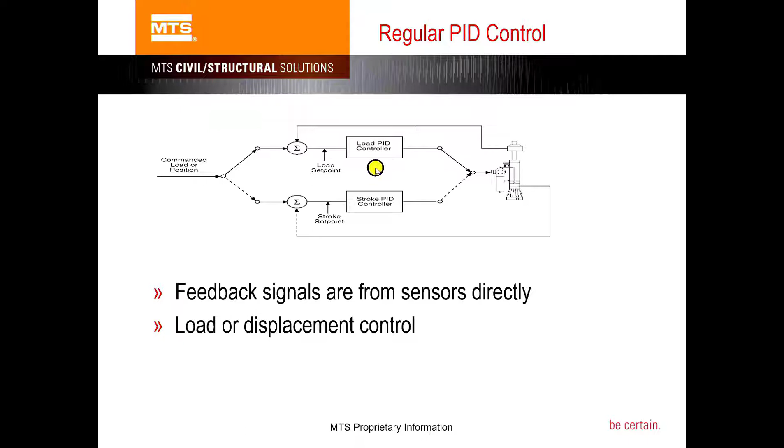You can do either load control or motion control, displacement feedback or force feedback, right? You have your command, you have your feedback, you close the loop based on that. That's easy if it's only one channel, one single actuator. But for example, DOF control, if you have 2 actuators now, a left one and a right one, and you are controlling this table, it needs to be controlled in the global degrees of freedom: the axial and also the rotational degree of freedom.

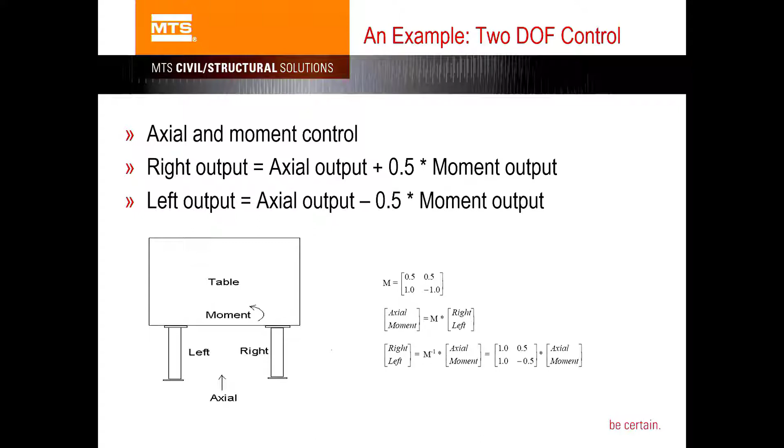So what you really care about is the structure degree of freedom. And then you can use the MTS calculation channel function to set up some simple functions to do that coordinate transformation, right? Because between the left and right actuator space and the global structure space, you can set up those equations easily and convert them into the matrix formulation.

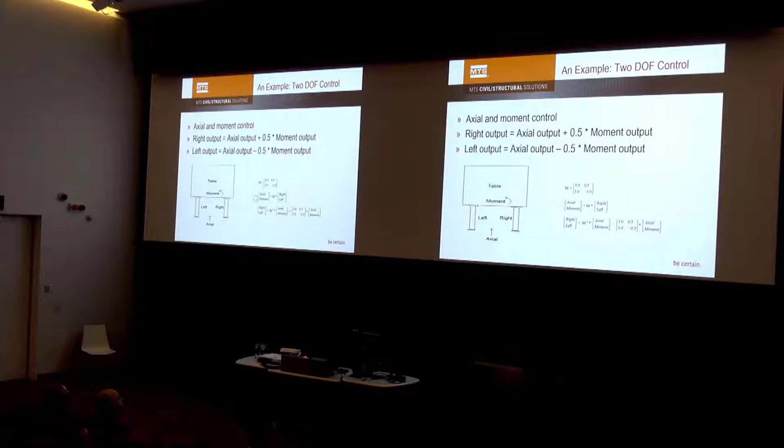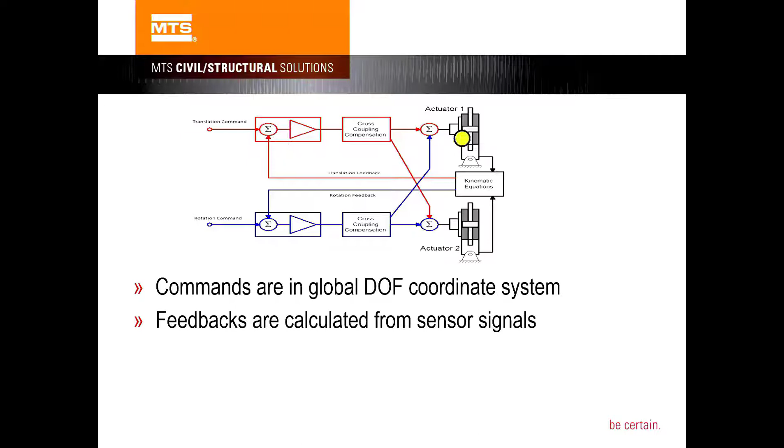And then now you are able to do DOF control, for example. Now your commands are all in the structure degrees of freedom, right? The translational and the rotational. And your feedback, of course, is still in the actuator space. So you need to go through some sort of transformation so that your feedback is also in the global DOF, degree of freedom space. Then you can do this calculation and this kind of control. You can do either force or displacement control, right?

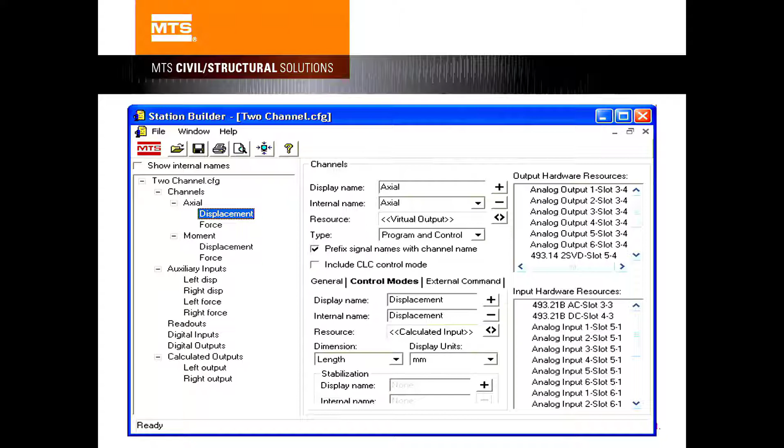So in terms of setting up, in MTS Station Builder, when you build a station, because this axial and moment are based on calculations, you use a virtual output instead of real hardware resources. And this virtual output can be expressed in the calculation editor. So you basically write out the equation between your structure degree of freedom and the actuator degree of freedom, right?

So what are the advantages of using this calculation function? First, this calculation editor in MTS software could involve operations on basically all the signals which go into your controller. Not only every single actuator displacement or force, command, or the servo valve drive, anything inside your controller, those signals can be manipulated and operated on using this calculation channel function.

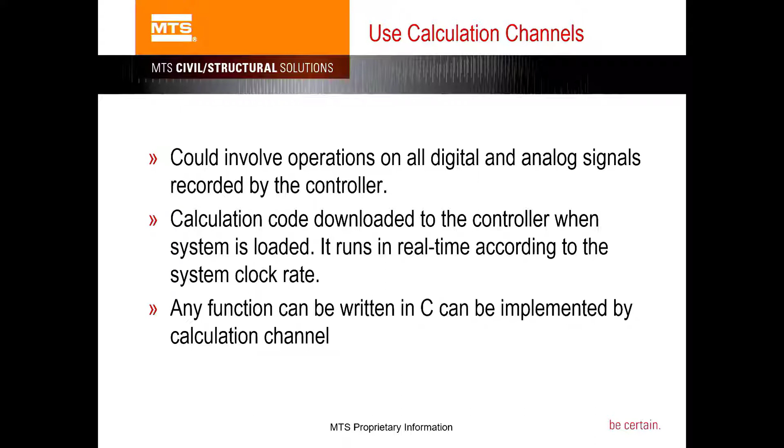And also, when you write down the calculation equation, this code will be downloaded into the controller, and it can be executed in the controller in a real-time fashion, right? It saves you trouble because you don't need to go deep and write your own C code. You can use the calculation editor to easily write down your equations. But if you are an expert in C, then you can come up with some fancy calculations, and this code will all be compiled into the controller to run.

So in terms of another application, a little bit more advanced application for this calculation editor, for example, this is the Newmark integration algorithm for hybrid simulation. For example, if you have a numerical substructure, let's say a simple shear building, you have a multiple degree of freedom dynamic equation of motion.

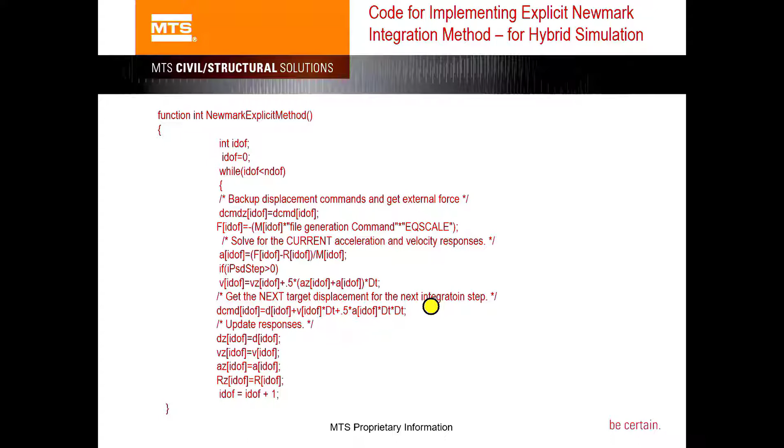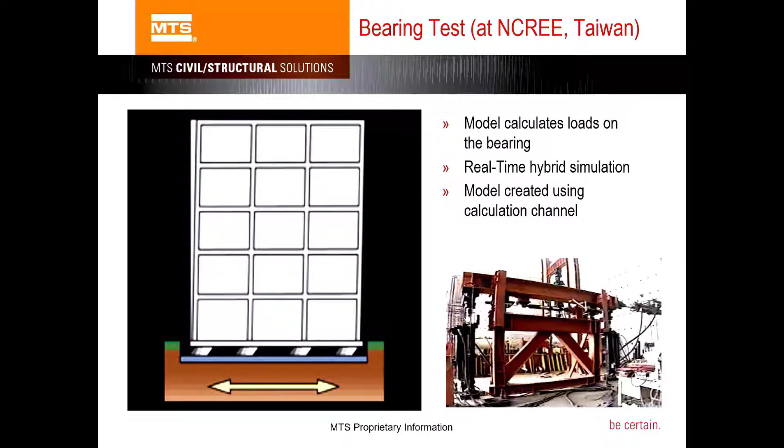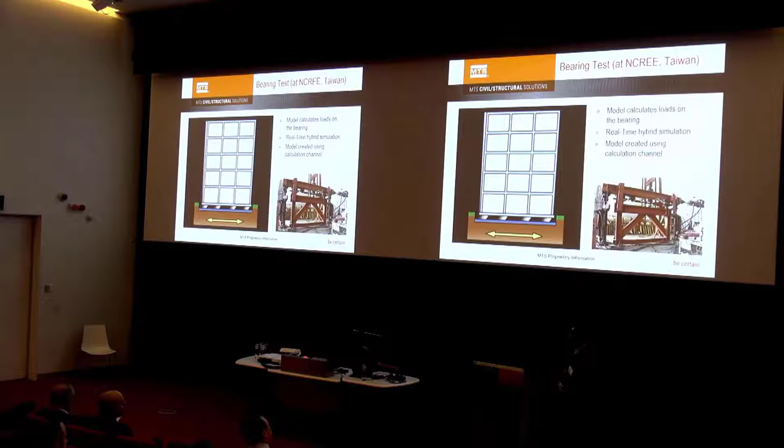Then you can test those physical bearings, because they are very nonlinear and they are difficult to model. And that's the purpose of hybrid simulation, right? You model anything that's easy to model. And then for the difficult to model part, you test them in a physical rig. So that's just one application for the calculation editor in terms of hybrid simulation.

And also a lot of the digital signal processing functions, you can do in the calculation editor. For example, you can set up this finite impulse response filter, FIR filter. So, define your passband, stopband, all these good things, and then do the signal processing directly at the controller level. For example, after you add this filter, you can eliminate your system noise significantly,

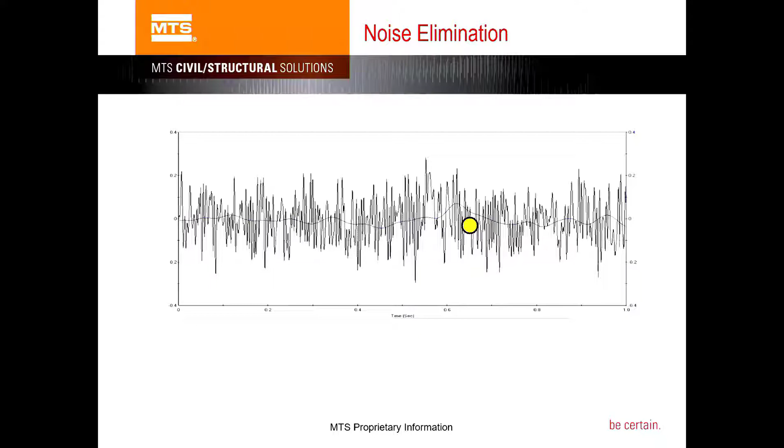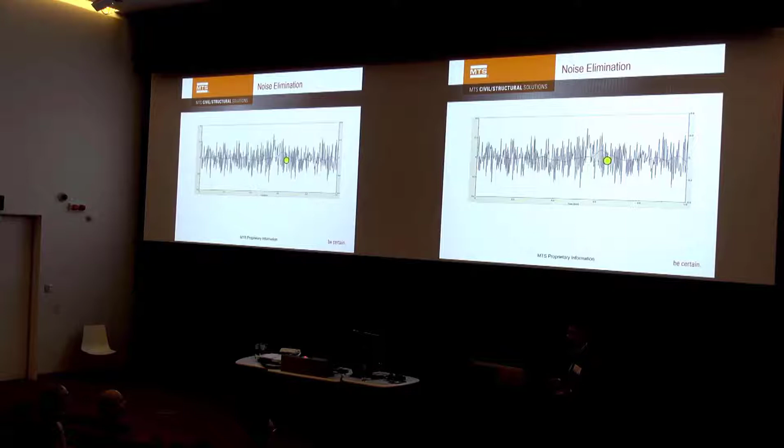because a lot of times, especially when your signal is used to close the loop, those noises can be big trouble. So you can define some filters in there to help your testing, not only in terms of hybrid testing, but also in terms of general, conventional testing. You can do a lot of those in the calculation editor.

So the next tool I'm going to introduce a little more is the MTS DOF control tool. Shawn Gao already covered a little bit about that and gave an introduction. So, for example, this is the Swinburne system. We've already seen that. This is an 8 actuator system controlling all 6 degrees of freedom, right?

And for this type of system, think about it, if you write it down in a calculation editor, that effort becomes non-trivial. You need to write down a lot of equations, and especially it's an over-constrained system because you have more actuators than degrees of freedom, and those equations need to consider all those constraints, so it becomes a non-trivial task. But using the DOF control tool, it becomes much easier for the user to program.

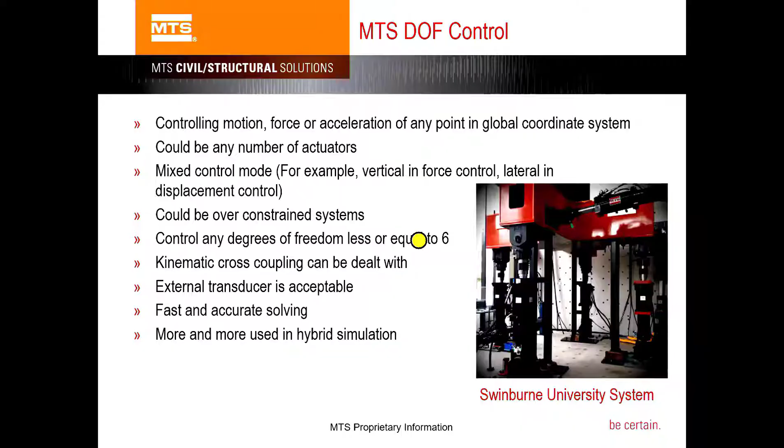So this DOF control has been extensively used in a lot of our advanced systems, and it can be used in displacement control, force control, and mixed control mode, and control any degree of freedom. If you have 3 actuators controlling 3 degrees of freedom, you can also use that tool to build your DOF controller easily. And you can use external transducers, not only the LVDT or the force transducer we provide, to close your loop as well.

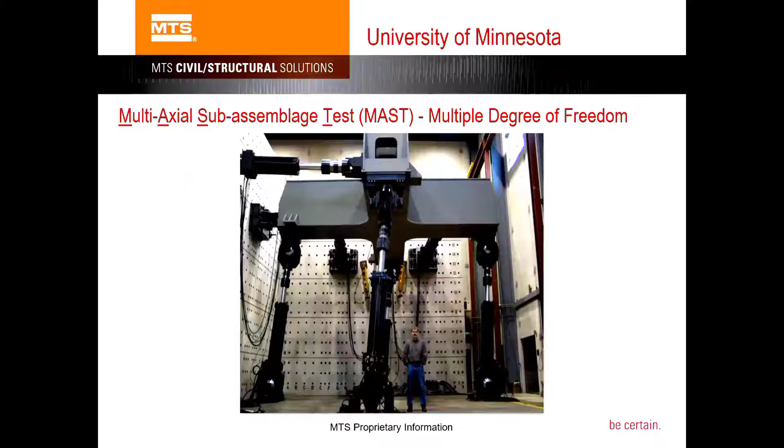And this DOF control has been used in hybrid simulation more and more. And as Shawn already mentioned, the University of Minnesota also has a similar MAST system. And for example, you can even couple multiple of these systems. Both of them are 6 DOF control, and you can set them up to make them move synchronously.

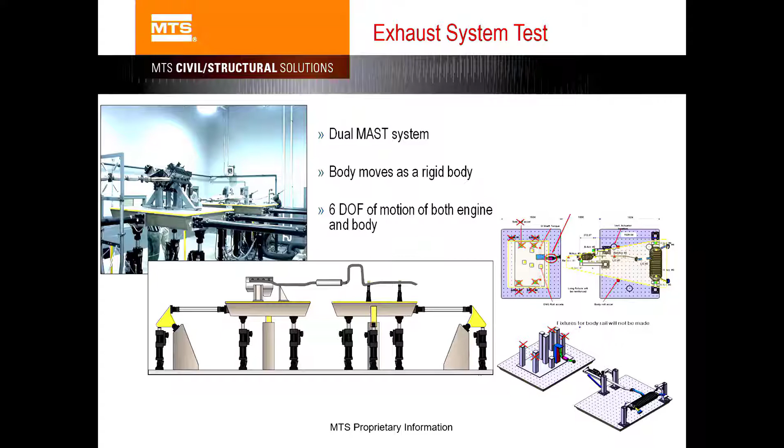And if you are testing a long article, for example, this is a vehicle, actually a ground vehicle application, and it is longer than one system can handle, then you can couple 2 of those tables to do your testing. And in this example, like a 6 DOF shake table, the actuators are all at different angles.

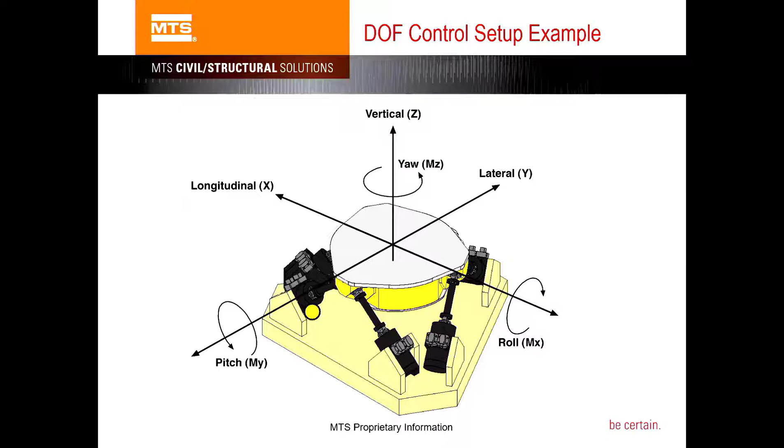Now think about that. If you write out your own equations, with all the large kinematic transformations, it's kind of difficult to program by yourself. But in the DOF control tool, we give you the user interface. You just need to know where, spatially, my control point is, where all the actuators are, and their orientation. You define 2 nodes to define a single actuator. Then it gives you all the visualization, and you can define them very easily.

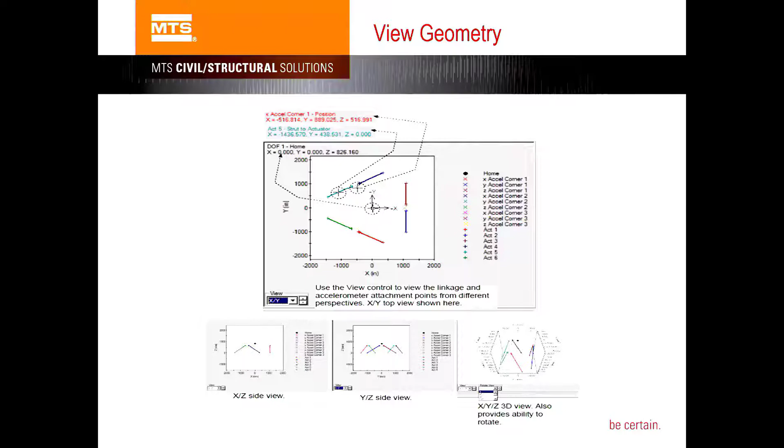Again, just a tool to facilitate any user to do more advanced testing. And in the DOF control, similarly, what happens is your command is in the global structure degree of freedom, and of course your feedback. First of all, they are all coming from individual actuators, and you have to go through some transformation to transform from the local actuator degree of freedom into the global structure degree of freedom. Then they are now all in the structure space. Then you can do your control based on that.

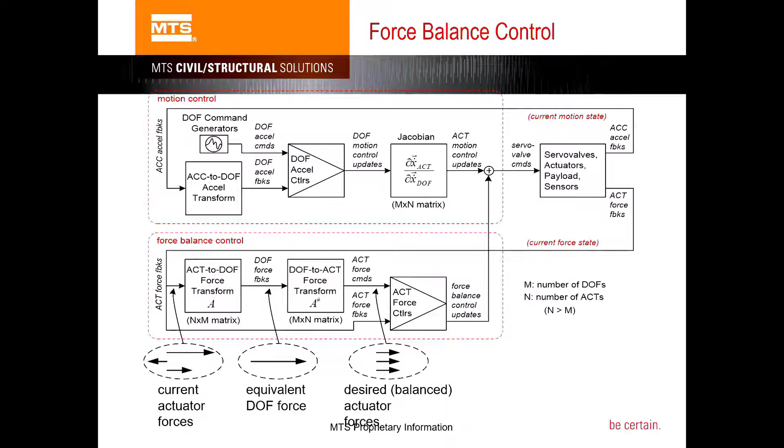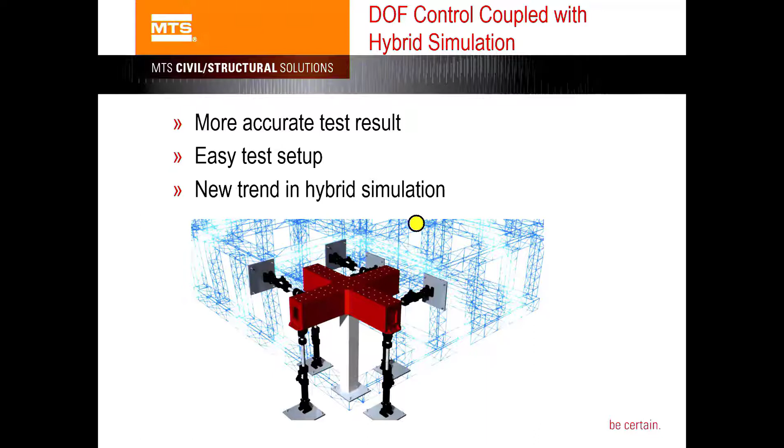And also the force balance control is that you need to satisfy not only the motion accuracy, but also for the mass system, you also maintain the force balance. Then that converges both displacement and force. So this is from Swinburne. You already saw this. So DOF control coupled with hybrid simulation is being more and more used, becoming a very advanced testing system. You can do more advanced hybrid simulation using those tools.

And then, go to the next level: okay, we have those tools. Now, the pseudo-dynamic hybrid simulation solution we offer. So, Shawn, you already covered this pretty much, but terminology-wise, we used to use quasi-static hybrid simulation all the time in MTS. I know Swinburne prefers pseudo-dynamic terminology, and some other universities prefer pseudo-dynamic hybrid simulation. We treat them as just slow hybrid simulation. Quasi-static, in terms of testing, if you only look at the test article, it's like a static test, really slow. Sometimes you cannot even see the motion with your naked eye.

But why do we call it pseudo-dynamic? Because when you do hybrid simulation, your system is a dynamic system, because your numerical substructure has all the equations of motion, has all the mass, inertia and damping terms. So you are solving a dynamic problem. Your whole system is actually a dynamic analysis. That's why we call it pseudo-dynamic, but in the meanwhile, sometimes we also call it quasi-static, just a slow hybrid simulation. So Shawn, you already talked about this.

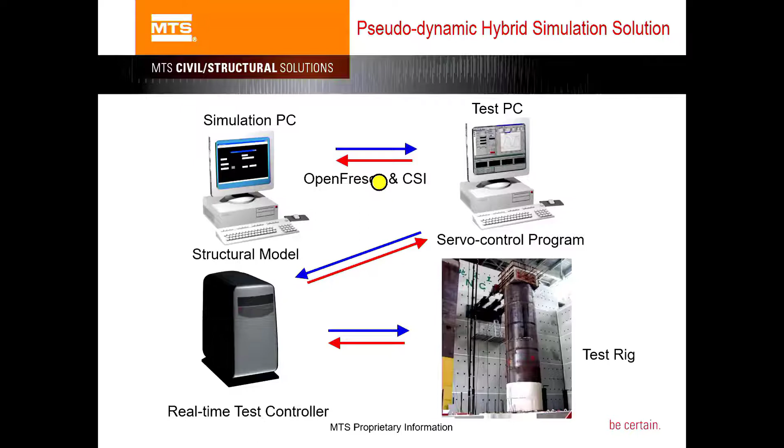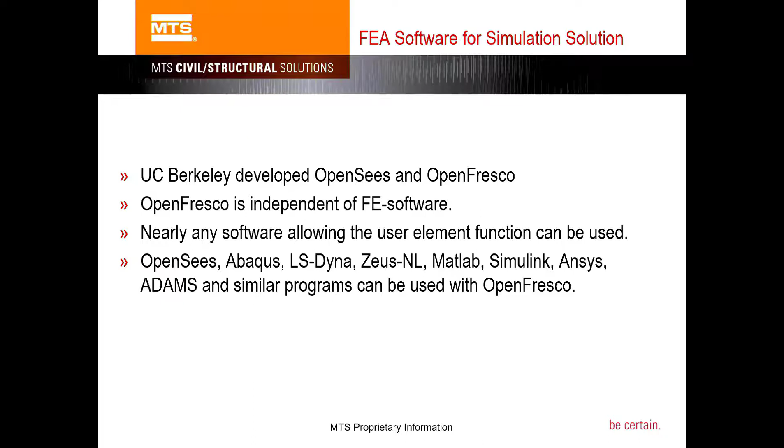UC Berkeley has this nice middleware, OpenFresco, developed, and MTS has associated CSI software. OpenFresco is independent of any FEA software. One of the questions we had before was how OpenSees compares with other commercially available FEA code. You don't necessarily need to use OpenSees. You can actually use ANSYS, Abaqus, and recently we also developed the interface for the multi-body dynamics software Adams. So Adams can be linked into the hybrid simulation world as well.

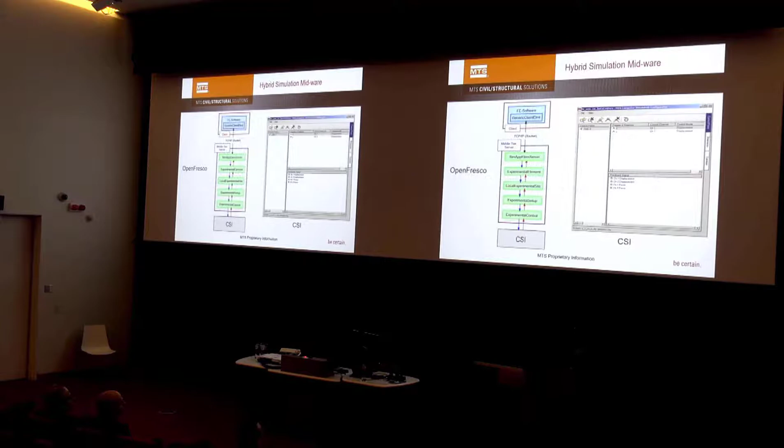So if you are more familiar with Abaqus and ANSYS, you can use that to do your numerical substructure modeling and still use OpenFresco as a middleware to interact with the testing hardware. Those solutions are all ready. So again, that's the middleware, OpenFresco, and this is the CSI, which maps the control channels. Same thing you already saw. This one I'll go into a little more detail. This is the DTU project.

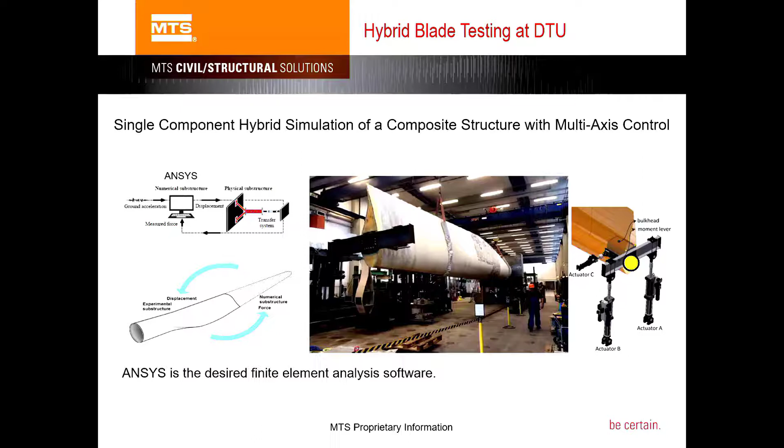They are testing this blade, Technical University of Denmark, and we had a project with them. We traveled to their site and helped them set up their system. In particular, they use ANSYS to model the numerical substructure because it's probably the industry norm and they are familiar with ANSYS modeling. Testing-wise, they use those three actuators to do DOF control to synchronize the boundary condition between the numerical and the physical substructure. During this project, we completed this user element for ANSYS to interact with the hardware. UC Berkeley started that development and eventually MTS completed it and made it available now.

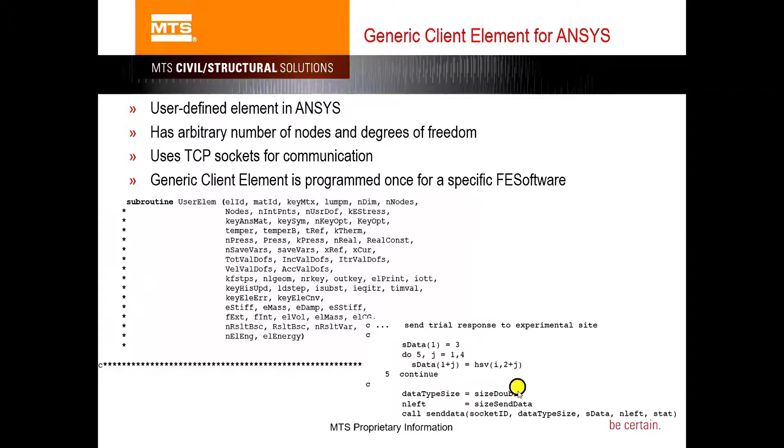In ANSYS, you can define a user element using the provided application programming interface, the API. With this user element, you can define any type of numerical element yourself. But for this specific user element, we are doing a generic client element. This client element is actually just doing communication, passing the command and feedback between the numerical world and the physical world. So we completed that development, went to DTU, and gave the tools to them.

But this is a test we did at MTS just to prove the concept that this code is working. That's just a very simple frame structure we built. And this is a physical column we are testing at MTS. Unfortunately, we don't have the luxury of such a nice system like you have in your lab. So that's what we have, and we just tested that.

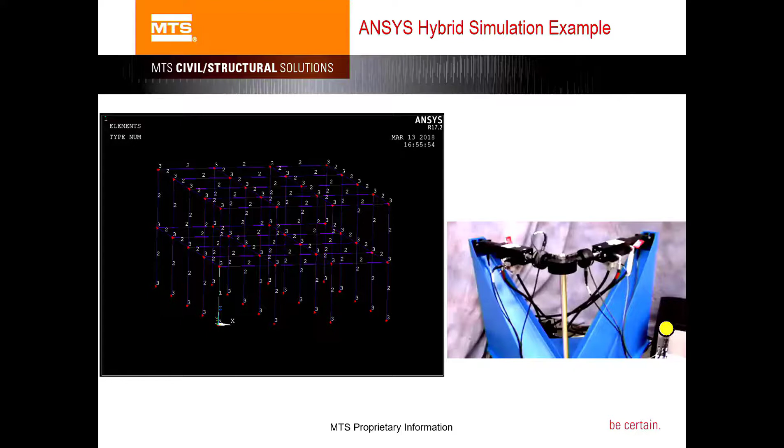Just to give you a quick video. It works like this: ANSYS is solving the model, right? And in the meanwhile, it's driving this physical substructure, and the feedback goes back from the physical substructure to the numerical substructure. And this is pseudo-dynamic, a slow hybrid simulation, right? Because ANSYS doesn't solve as fast as the real-time requirement, so it has to be slower than real-time.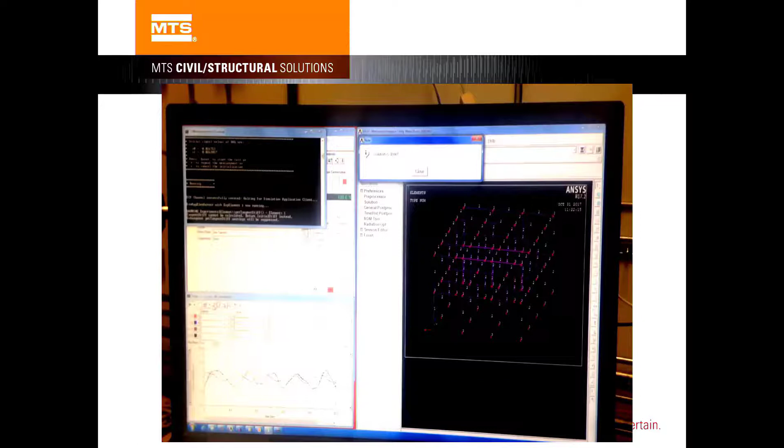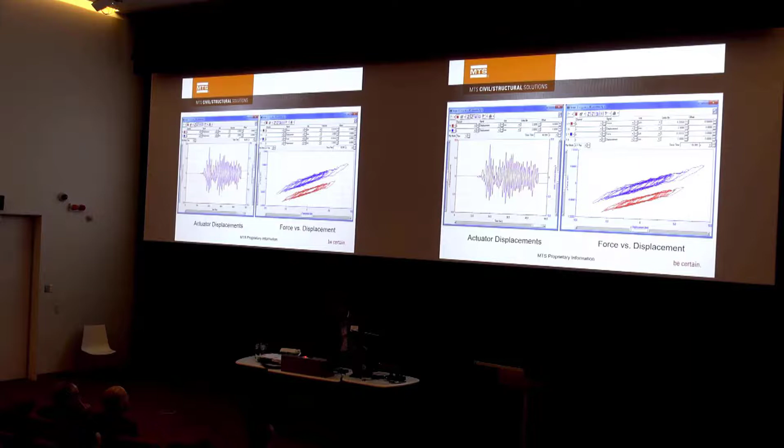So those are the results we had, X, Y, we have two actuators, right, X and Y direction. And then the hysteresis, because that column base is actually quite a nonlinear hinge in there.

And we talked about this geographically distributed hybrid simulation in Professor Mahadi's introduction. That's a very powerful tool, because now you can link resources around the whole world. Any single lab doesn't have all the testing equipment you wish to have. If you have multiple labs, you can collaborate and do this distributed hybrid simulation. And some people actually already claim they can do distributed hybrid simulation in real time. There are some publications already on that.

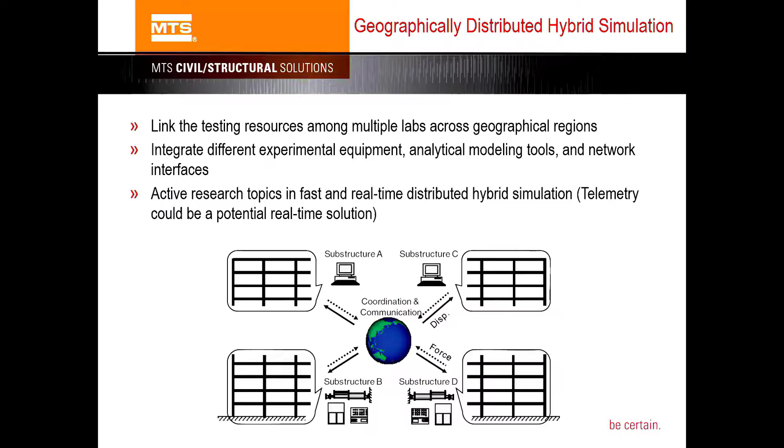And lastly, going a little bit beyond this, is the cyber-physical system. A lot of people talk about it. The National Science Foundation in the U.S. thinks this is the future of internet technology, and it's actually Industry 4.0. I think that was started by Germany. So the fundamentals of that are also all kinds of cyber-physical systems.

So essentially, you have a lot of computational elements, control, and communication, all happening with our information technology. Then you have a lot of physical systems, right? Like our loading system and the specimen and everything. And you combine this information technology with the physical system, and especially you make them talk to each other globally, like the distributed hybrid simulation system. That's a very good example. It's one type of cyber-physical system.

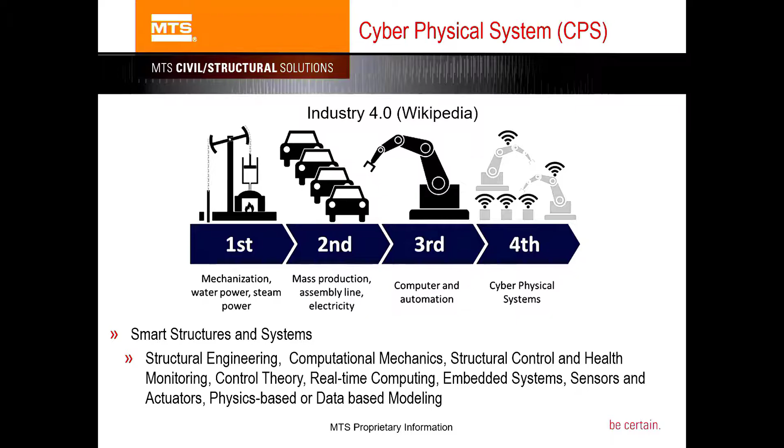Of course, this CPS is so wide. Like Professor Mosalam also said, like the daylighting control system, whatever system containing computational elements and physical elements and the control action in between them is categorized as one type of cyber-physical system. So in our application, in structures at least, you have the smart structures lab at Swinburne University.

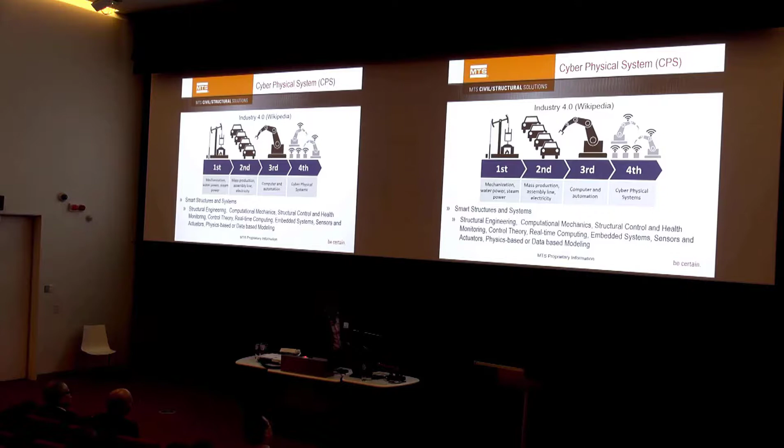So anything smart, you can think of as a kind of cyber-physical system, because now you have a lot of things. You have structural engineering, you need to know computational mechanics, you need to know control, because you need to drive the physical system. You have real-time computing, because those all need to be embedded systems, all kinds of dynamics from sensors or actuators, all kinds of modeling tools. So it's really a very large and vast concept. But I think that's the trend we are catching.

So in conclusion, we have a lot of tools we can offer you. For example, the calculation editor helps you do either regular testing or hybrid testing. And the DOF control software is a really advanced technique. It's very useful if you are coming up with a spatially distributed configuration of a testing rig. And hybrid simulation integrates the 3C, computing, control, and communication, with a more realistic and affordable structural analysis. And again, this hybrid simulation system is just one type of CPS.

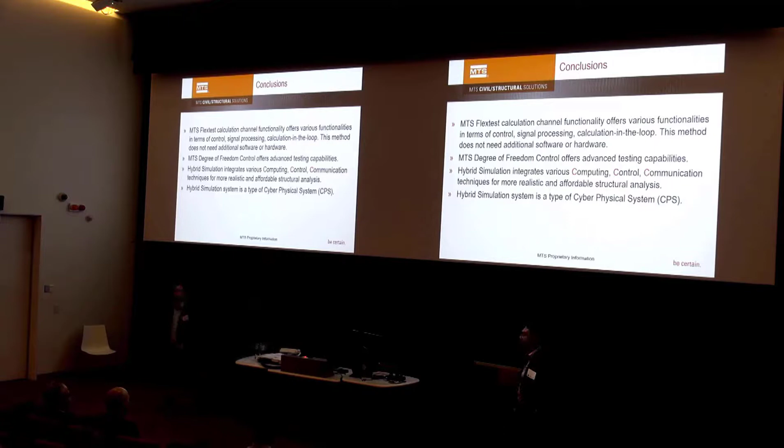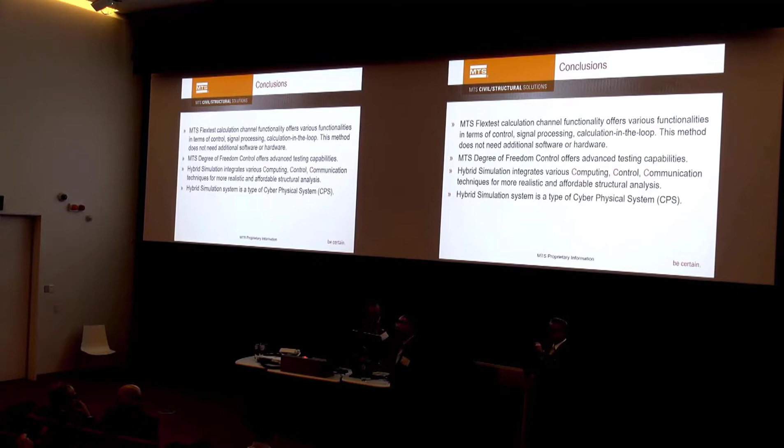Yes? Just one. You showed this station builder, where you say you've got 4 degrees of freedom or 6 or whatever on your actuation system, doing the calculations to transform from physical space to global coordinates. Is there also a tool that lets you drive the rig or facility that way? Say you want to drive a rig in roll or pitch or whatever. Instead of having your 4 actuators, you've got a control system that will say run that channel.

Yes. I think that's exactly the purpose of this tool. In the first place, if you want to control that global degree of freedom, but you don't want to worry about how those signals are passed into each single actuator, then you use that and it will do that for you.

Is that a standard feature of this RTC Pro or is it hybrid software? The calculation editor is part of the 793 software. And the DOF is now also available in 793. It's a separate module. So the hybrid simulation is kind of one layer above it, utilizing the existing tools. Thank you. Okay.